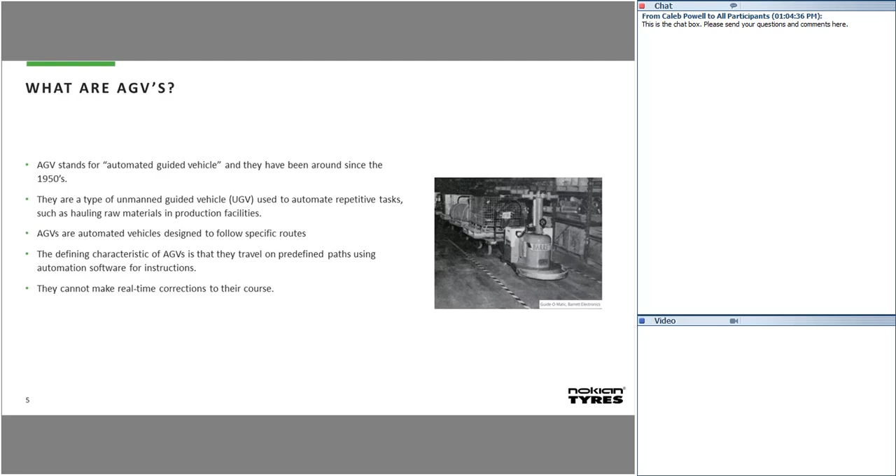But they actually were invented in the 1950s, which I was surprised to learn. Picture there of the first AGV. And of course, they've only progressed as technology advances. As far as what they can do, really they're just a transport device.

In a warehouse situation, which is one of the common applications, they're moving materials, pallets, bins from point A to point B. Or in some instances, I've seen applications where instead of a traditional conveyor system, the AGVs themselves are acting basically as the conveyor, moving a widget along a process line, and people are adding to it as it passes by their work areas. So anything in that realm of activities are things AGVs can do.

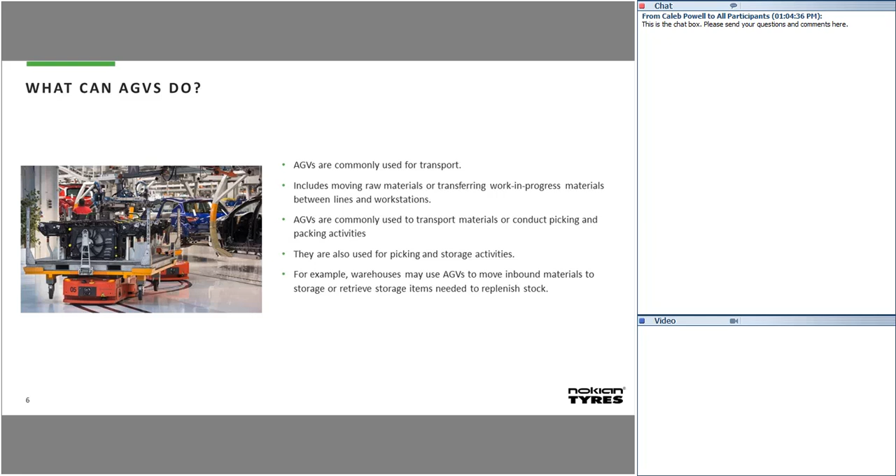A couple different styles are out there. The one we use is the one on the far left that you see, a forklift style AGV, which I would say is the most advanced of these five types. But carts and tuggers are similar in that they're both just moving a rack with parts from point A to point B, with the difference only being that a cart style is where the rack or cart is an integral part of the AGV, whereas a tugger is like the picture you see on the far right, where it's picking up wheeled carts that can be dropped off and left at various locations.

Unit load and heavy haul are more specific to the type of load that's being handled, with heavy haul, of course, being something designed for very heavy loads. The one in the center bottom would be an example of those sort of AGVs.

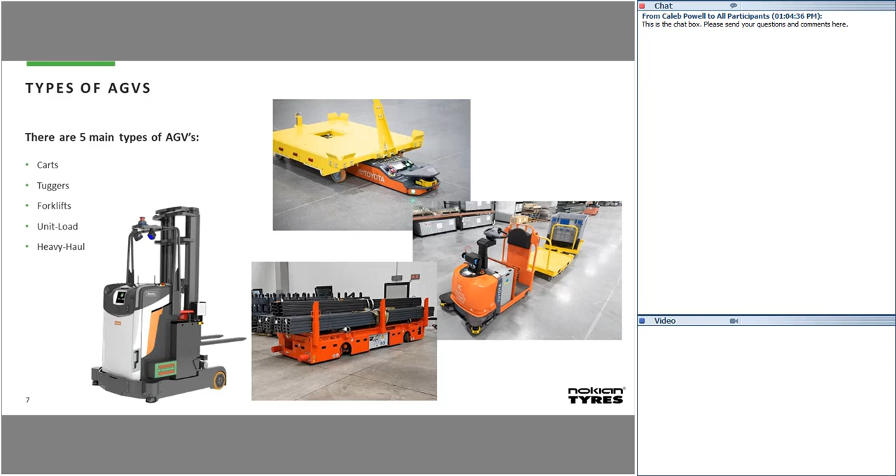So now to kind of get into how our AGVs operate, our guys like to get a little bit creative. You can see they've added giant googly eyes to many of our AGVs. But as I mentioned, all of the AGVs that we operate at Nokian Tyres are the forklift style.

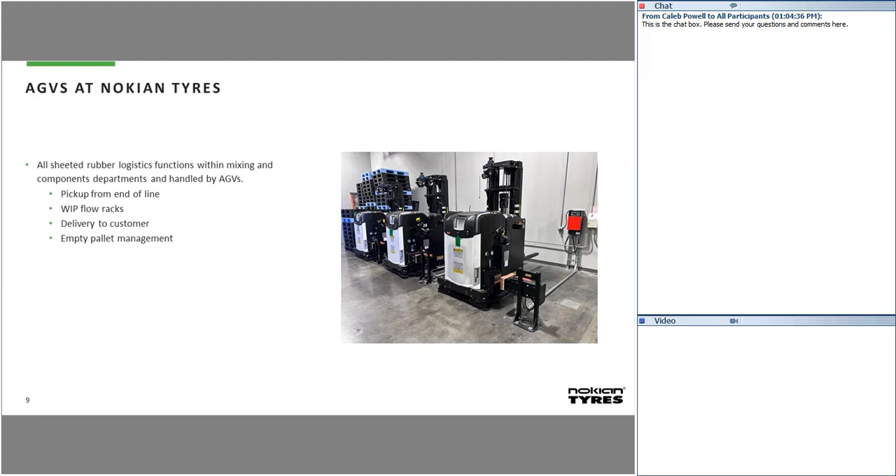In this picture, you can really see the primary way they're used is to transport pallets of sheeted rubber. So it's really an internal warehouse logistics system. Those pallets of sheeted rubber are picked up at the end of our mixing process, and they go into in-process flow racks, and then from the flow racks to the customers or internal customers, which is our components department. They're also managing all of our empty pallets. I'll show some examples of those things.

So here, end of the line, the mixing process is very complicated and multi-step. But in essence, what you get is all the raw materials get mixed in a mixer, similar to mixing ingredients for baking, and it processes the rubber into flat sheets that get stacked on a pallet like you see on the left there. That pallet, when it comes out of the mixer, sends a signal to the AGV management system, and the AGVs will come and pick up that pallet. It knows when it receives that order what is on that pallet and where it needs to go, and it will deliver it to the in-process flow rack, which you see on the right-hand side.

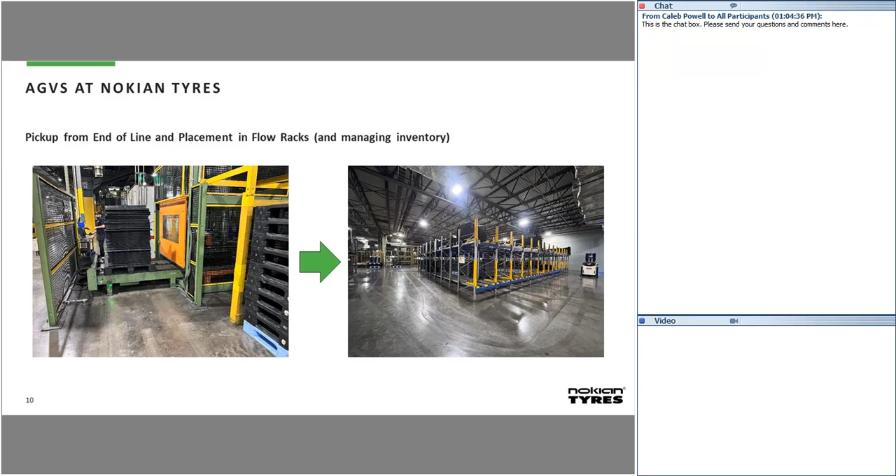So we've actually got two different flow racks. The ones in this particular picture happen to be basically the first pass batches of rubber. These end up coming back to the mixers, and they go through, and we add additional materials to create the final batch of rubber that is ready to move on to the next part of the process. So all of that internal handling and management of inventory is managed by the software that runs the AGVs. I'll show a screenshot of what that looks like later on. So after the mixing is done, we've got the flow racks that are full of what we call final batch.

It's ready to go on to manufacturing individual components of the tire. These are all first in, first out flow racks, so the AGVs basically operate on a keep full system. They will receive a signal from individual areas downstream saying there's no longer a full rack or a full pallet of materials in spot A. The AGV will then go to where it knows there are full pallets of that material and deliver it to the other side of the plant, where we have flow racks that sit in front of another process or another machine, or for machines that don't use large quantities or only use one type of rubber, there's spots indicated on the floor.

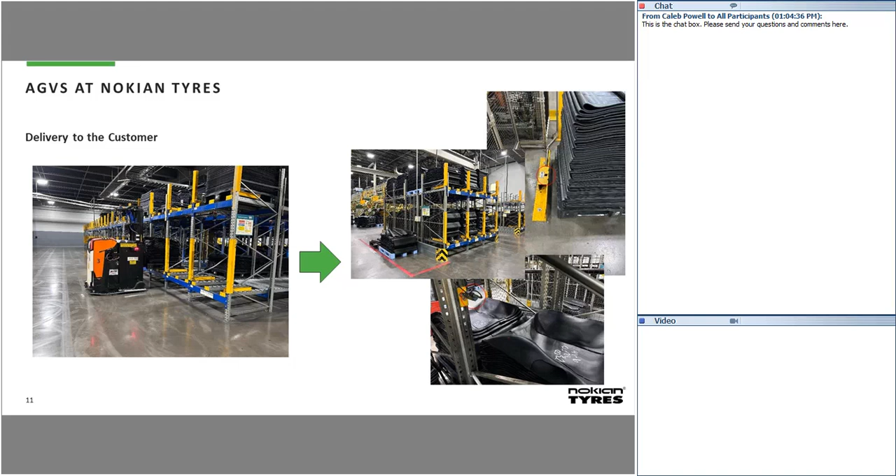In both of those, it's a little hard to see on the screen here, but I've circled them in red. I don't think my mouse is showing up, but those are basic sensors that tell the AGV system whether or not there's material present.

On the empty pallet side, as operators consume the rubber and generate empty pallets, there are designated locations where these get stacked. The system will know when the first pallet is placed. If you look at the picture on the right, you'll see in the middle of that yellow rack, down near floor level, a hole where there's a sensor, so it'll know someone has started a new stack of pallets.

As those stack, once the tenth pallet is stacked, it'll trigger the next sensor, indicating to the system that there's a stack of pallets ready to come back to mixing to be repurposed. If someone adds an eleventh, there's an additional sensor — the stack's too high and won't work for our process — so the AGV won't pick that up until someone removes that eleventh pallet.

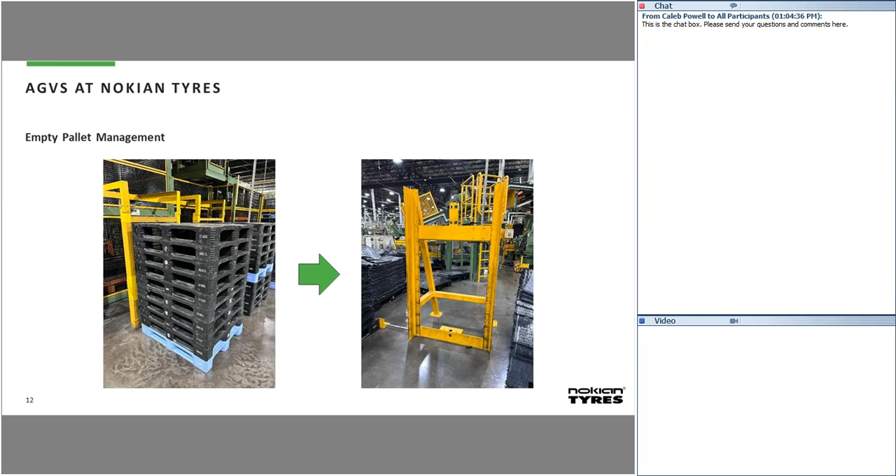And this eliminates a lot of errors since we're not relying on humans to choose the correct rack and deliver to the correct location. As long as the correct compound is in that rack, and the information the AGVs are receiving is correct, we'll never have the wrong material going to the wrong location, and we're always going to have material available for when that downstream process is pulling.

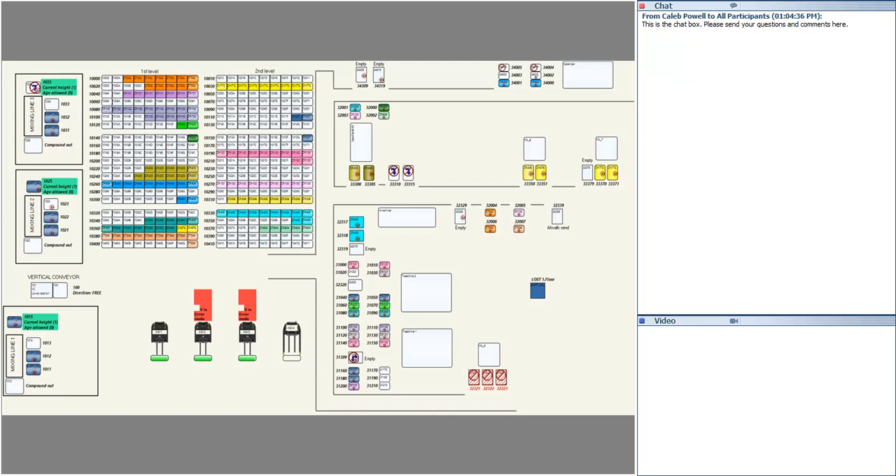Of course, you might be thinking, like a lot of our employees when we hire them in — how is this even safe? There are a number of safety features built into these devices, really no different than any other piece of equipment where you rely on e-stop buttons as well as light curtains and safety scanners. The difference is that this piece of equipment is mobile versus stationary, but in the same way we protect against mechanical motion, running nip points, and things on stationary equipment, the movement of this equipment throughout our facility is controlled by similar systems.

So there are a couple different laser scanners that monitor in the direction of travel, either fore or aft of the machine. These typically travel with the forks trailing behind it.

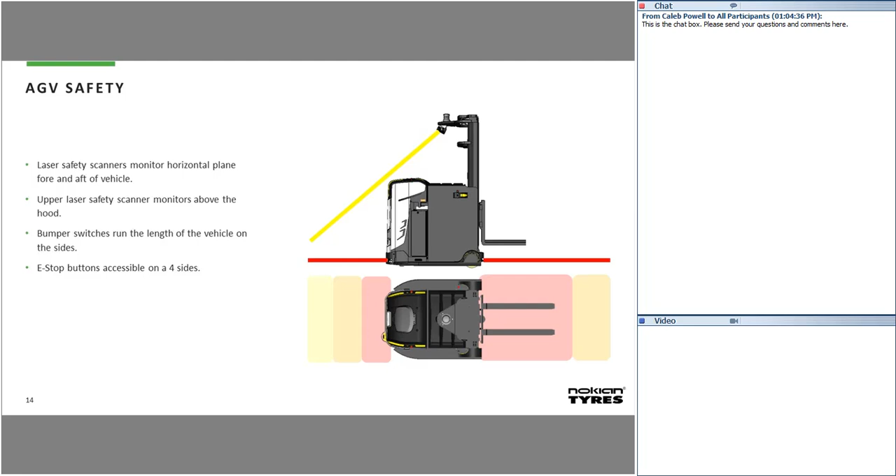All along the perimeter of these are bump stops. So if you were to just kind of kick it with your foot, it would be the same as standard safety bump stops on any equipment, as well as standard e-stop push buttons on all 4 sides. We've never had an incident with these. The company that makes the equipment we purchase is called Rocla. They've never had an incident with any of their forklifts with other customers either.

So feel very comfortable working in and around these in our factory. To tie it all in with sustainability, of course every user is going to have differing benefits applicable to their business. Being a new factory, it wasn't a situation where we were moving from internal combustion forklifts to electric forklifts. But of course, energy efficiency is notable, and of course they are fully electric.

Our entire fleet, including the manual traditional forklifts, are electric. But one of the potential benefits, since they are operating independent of human interaction, is if you had a warehouse that was unmanned, they can operate in complete darkness, so you would save on some of your illumination costs. We're staffed, we have employees in pretty much every part of our operation, so it's not something that we can do, but that is notable for other customers.

From an emission standpoint, even though they're electric, one of the things I can attest to is that an AGV is going to operate predictably, and it's always going to be operating in the most efficient manner. Unlike human operators that may accelerate quickly, stop quickly, or perhaps even use the forklift for purposes other than intended, to drive to the restroom or break room, or maybe to the door on their way in or out. AGVs are only operating for value-added purposes.

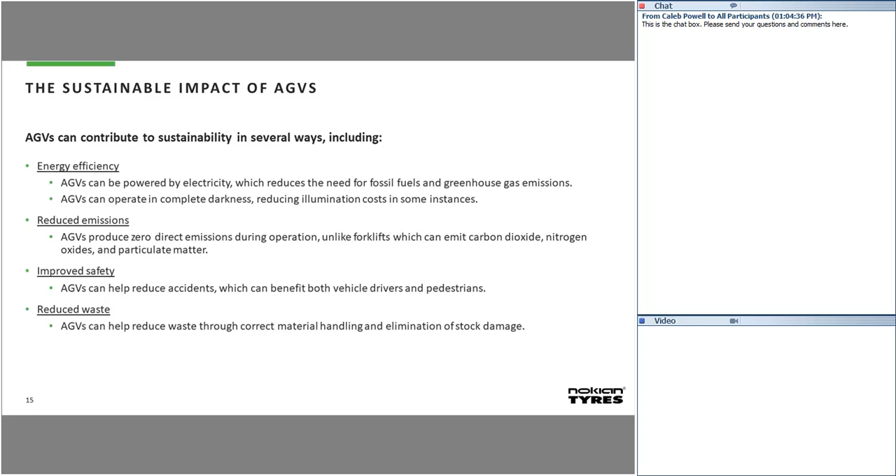From a waste standpoint, for us specifically, if we ever have a situation where the incorrect material is used to produce a component of a tire, the ramifications can be quite serious, and it becomes a safety issue for our customers down the road if it were to make it out the door, which would be highly unlikely. But this really eliminates the probability of errors from having incorrect material in the wrong location. So that's a big impact on our internal waste numbers.

AGVs never need to take a break other than a charge. I didn't mention earlier, but each AGV has its own parking location, and at that parking location it is automatically charging. Similar to how most cell phones are placed on a wireless charging mat, the AGV batteries are charging in a similar fashion.

As far as longevity and lifespan, the expected lifetime of an AGV is 15 to 20 years. However, with modernization packages that Rocla offers, we foresee that these will be in operation substantially longer than that if we implement those modernization packages. That may include improvements to the navigation systems or the type of sensors they use -- every generation is a little bit better than the previous. We actually just ordered 4 additional AGVs that were delivered a couple weeks ago, and they've got additional vision systems and sensors that the first generation didn't have, so that can only make these more efficient. I would expect some of those modernization packages would incorporate some of those technologies.

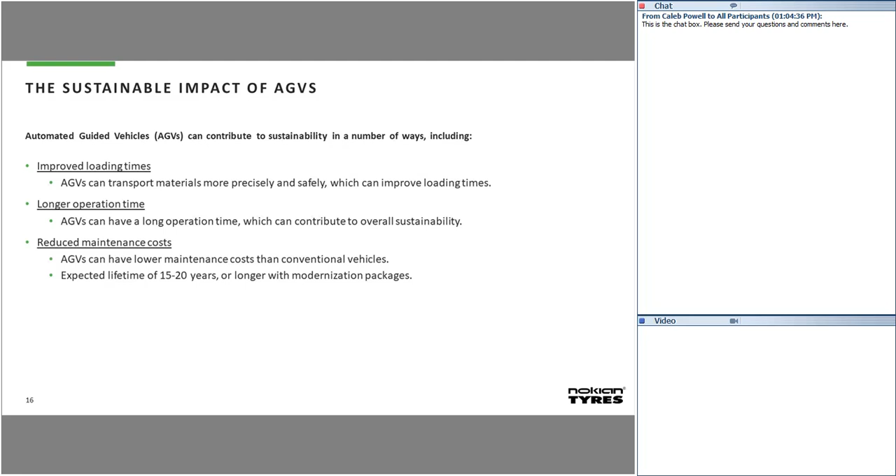So to wrap it up, we have been and always will be interested in the investment in technology and automation to streamline our process. And it's a big part of how we are as profitable as we are.

AGVs played a big part in this, and we see these fleets as being highly reliable with almost no downtime, with the consistent inventory management that doesn't require human interaction, and they've proven themselves as being safe and part of our sustainability efforts.

That was the extent of my content. Of course, if anybody has any questions, I'm happy to answer those now, or I'll stay on and you can ask them at the end.

Thanks, Darren. It's always cool to see—well, get to hear. I've been able to visit your facility and see them in action, but to hear you break down the pros and cons of them is really helpful, especially to the audience.

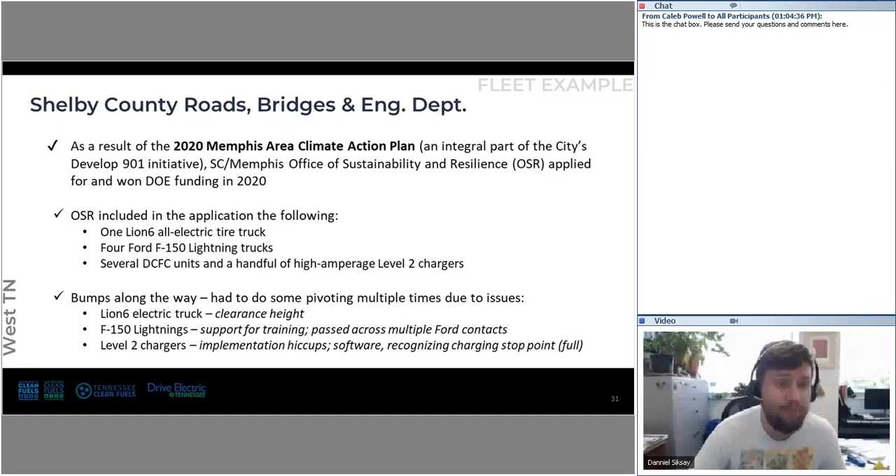They have plans to continue to electrify, and this was kind of their first stab into this world. But I've been impressed with what they've done, and I think that this is a start that they're going to be able to build on.

I wanted to talk about next a fleet in Middle Tennessee, in Clarksville to be precise, American Snuff. It's quite a name. They produce multiple lines of tobacco products near Clarksville, and now you see, oh, I get it, American Snuff. They had complaints about diesel emissions, which is pretty common when you're working in buildings with diesel vehicles, terminal tractors, etc.